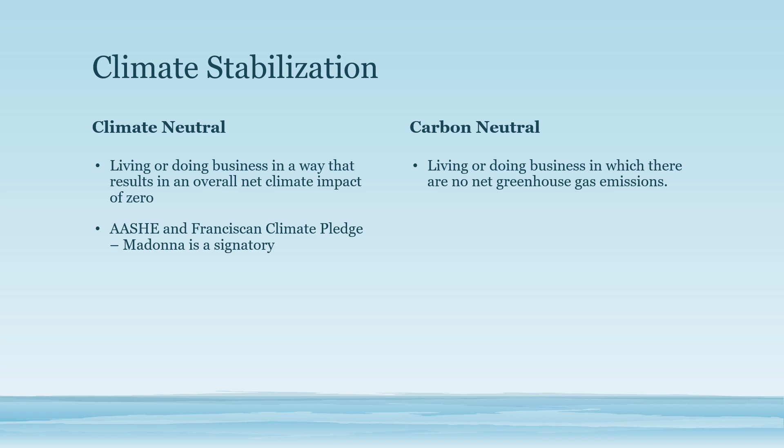Carbon neutral is living or doing business in which there are no net greenhouse gas emissions. It's not that much different - one looks at emissions of greenhouse gas, the other looks at total climate impact. The problem with carbon neutral is if you get too narrow a focus on it, you can overlook other greenhouse gases in addition to CO2 when formulating how you're going to get there.

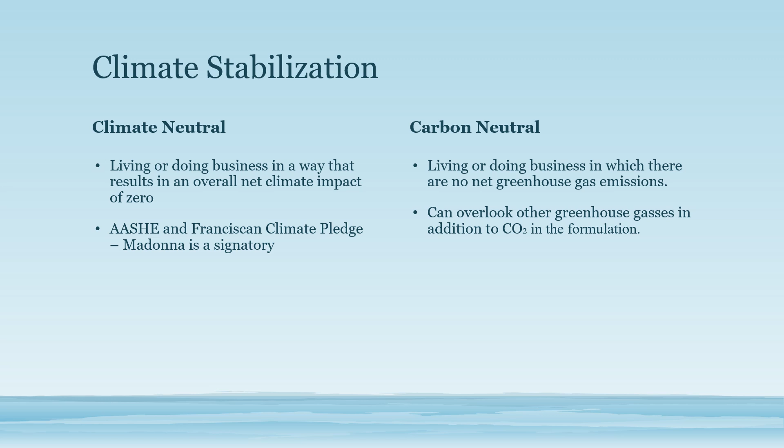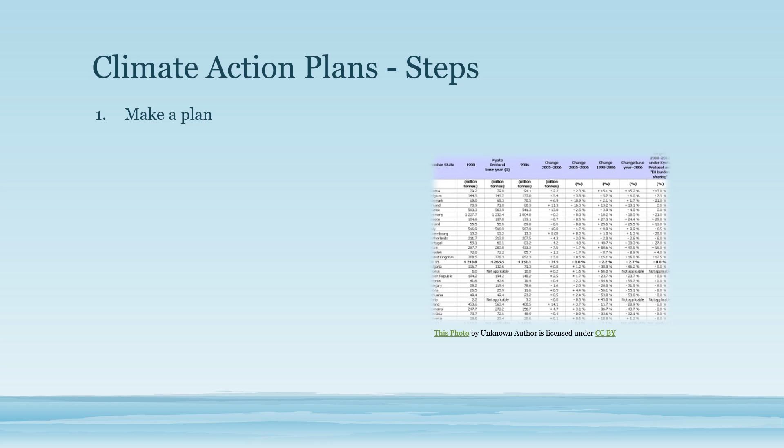So what are some steps for climate action plans? There are 4, as your text makes known on page 79: you make a plan, you measure - which involves preparing a greenhouse gas inventory, done on the right-hand side, which we'll talk about when we get into energy, especially Energy Star - then you reduce emissions, and offset any remaining emissions.

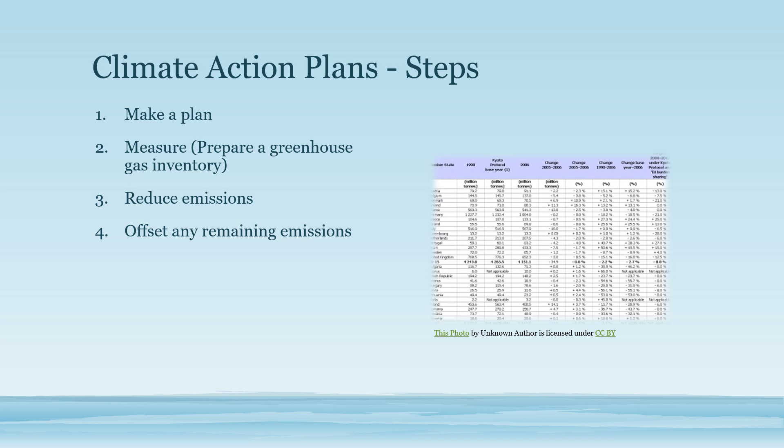So first of all, make a plan. What are the boundaries of the plan? How much of the organization is included? What's the scope of this? Who's got to buy in? Who's responsible? What kind of emissions will be the focus of the plan - just carbon dioxide, nitrous oxide as well, other pollutants, particulates?

Will the scope of emissions be strictly within the organization, or will we look at indirect use beyond it, like upstream or transportation among our employees or partners? You determine who's going to be involved in the planning process, who's going to be the leader, who the parties are. You get a group of people, either outside consultants and/or in-house - when Ford Motor makes their inventory, they have the resources to set up shop within. And then make sure every step is in writing, so everything's transparent and accountable.

So step 2 is measure, and you look at to what extent is your organizational reach in terms of what emissions you're going to look at and try to reduce. Scope 1 focuses on emissions that are owned by or controlled by the organization.

Then expand that. Scope 2 would include emissions from purchased electricity or purchased heat that you're taking in, whether it's a school or an industry or whatever.

Scope 3 would include indirect emissions from other sources, such as vehicles owned by others and used to transport people or goods, the extraction and production of resources purchased by the organization, and the end use of the product sold. What kind of packaging or whatever, how do we deliver that to places to reduce our carbon footprint?

Now, according to the Greenhouse Gas Protocol, which sets this forward, Scope 1 and Scope 2 should always be incorporated into a reduction plan. Scope 3, however, is optional.

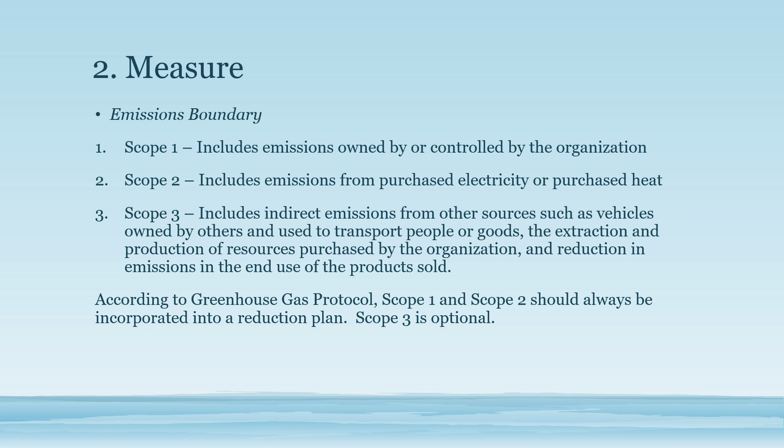So here's more about measure in particular. You collect data from several sources on emissions associated with the organization. Then you calculate. Tools are available for this step.

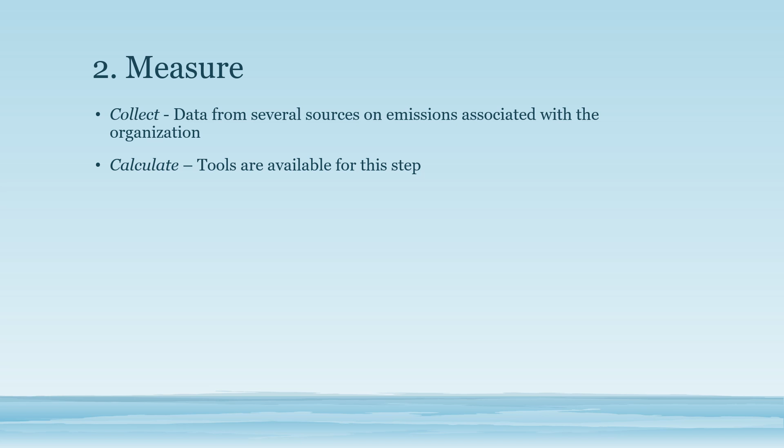And I'm going to talk about calculate when we get to Energy Star and the portfolio management database system again in a few weeks. We'll revisit this.

Quality control: you have a third party check the data and the methodology of collection to ensure integrity of the process.

And you have regular evaluation of the progress. As I mentioned, the EPA Energy Star Portfolio Management Database System does that. We'll walk you through that when we talk about Energy Star again.

So, to reduce emissions, that's number 3: low-hanging fruit, and then symbolically powerful approaches. One thing is to change your behavior, educate the staff—turn out the lights if you're going to be gone 10 minutes, set the temperature down when you leave, those kinds of things.

Energy efficiency: maximize your payback or return on investment. Payback is like how many years until an investment pays for itself—remember when you went from incandescent to compact fluorescent lights, it burned like 30% of the electricity. So the payback was in less than a year.

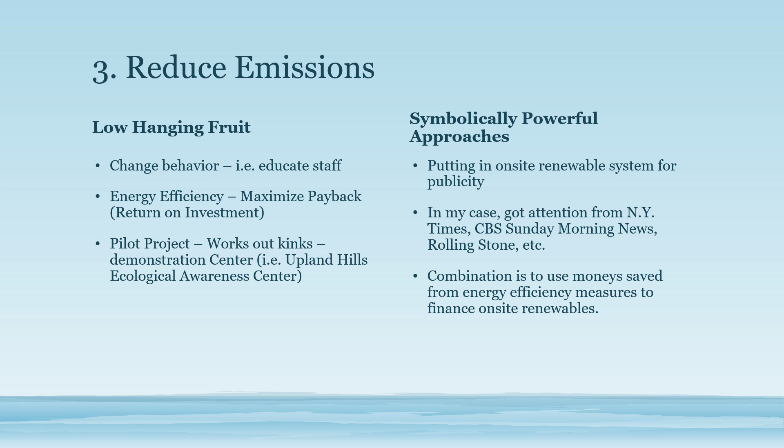So the combination then is to use money saved from energy efficiency measures to finance on-site renewables. These are symbolic because they're very visible. Even though energy efficiency is going to save you the most money and reduce the most—that's without saying—if you want public attention, sometimes you do these demonstration things, which are very visible, like a wind turbine on your site.

There are some energy strategies. Energy efficiency reduces demand - there's the demand side and supply side. Demand side is needing less energy, less fossil fuel to begin with. The supply side, or generation side, is producing replacement electricity from renewable resources.

The other thing you do is switching to a less polluting source. For instance, you go from a coal-fired power plant to plants that run on natural gas. They're still producing greenhouse gases, but much less, so it's a transition fuel - just like going from incandescent light to compact fluorescent light, then to LED light. Compact fluorescent lights are like a transition lighting source.

So you put out on-site renewables, or you purchase renewable energy credits, RECs, also known as green certificates. For instance, Native Energy is one of them, which I used to help support native wind farms - I was trying to be carbon neutral, and I still was. I did calculations one year when I went to a hybrid, doing on-site renewables, energy efficiency, using the local farmers market, but it was still way too much. So I asked, how could I be somewhat carbon neutral? The last part was purchasing offsets or green certificates - we'll see later.

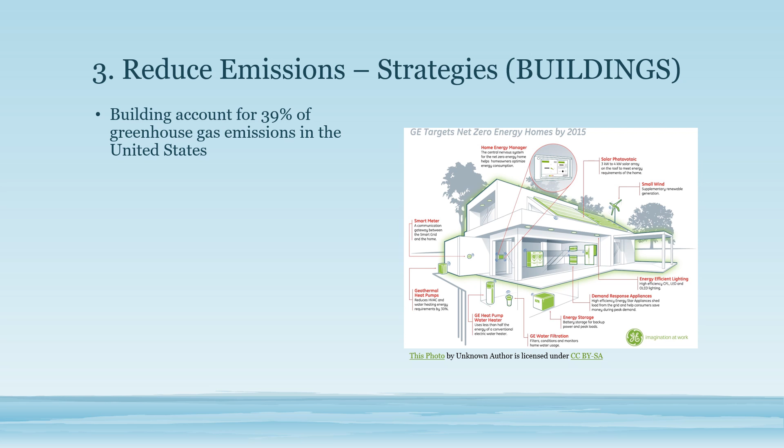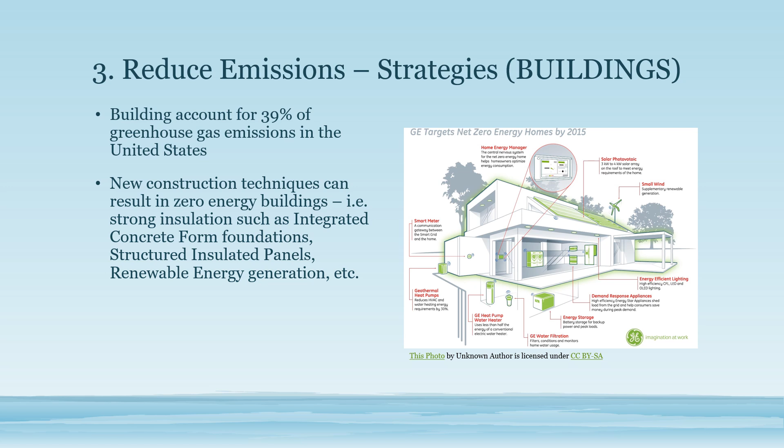Reduce emissions in terms of buildings. Buildings account for 39% of greenhouse gas emissions in the United States - that's not in your text, but it's another source I got. New construction techniques can result in zero energy buildings, as you can see in that picture on the right. There's strong insulation such as integrated concrete form foundations, ICF, and structured insulated panels. I went to a workshop on this in West Virginia some years ago just to learn it, maybe for my own future - renewable energy generation, etc. Using geothermal, geoexchange - we'll get to that, ground source heat pumps.

Operations and purchasing - you schedule maintenance on your HVAC systems, heating and cooling systems. You switch, and one thing you can do is purchase HVAC that's later called combined heat and power, but we'll talk about that when we get to energy.

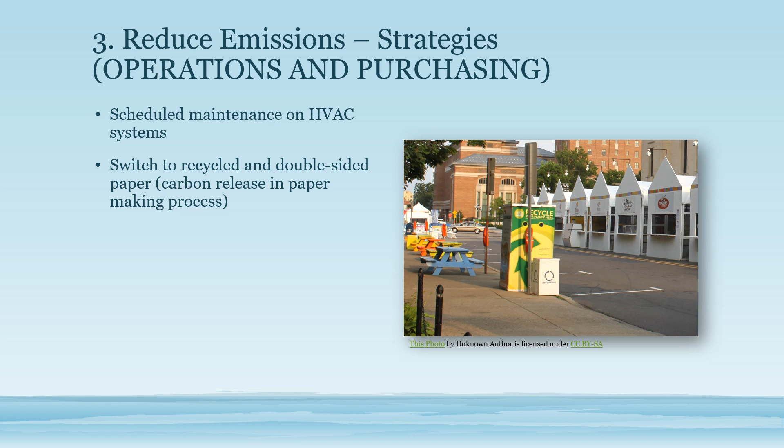You can switch to recycled and double-sided paper. Carbon release in the paper making process is quite intense - my cousin lives in Manistee, and there's this old paper mill that really spews out greenhouse gases. The use of recycled material requires fewer raw materials. There's a great recycling place that was first in Madonna near Henry Ford Hospital, and they also had things to make compostable products for eating, so it's become much more popular. Another positive benefit of recycled material is that it reduces the methane gas emissions that emanate out of landfills. I was trying to get this from Recycle Ann Arbor - you can see a recycling center there.

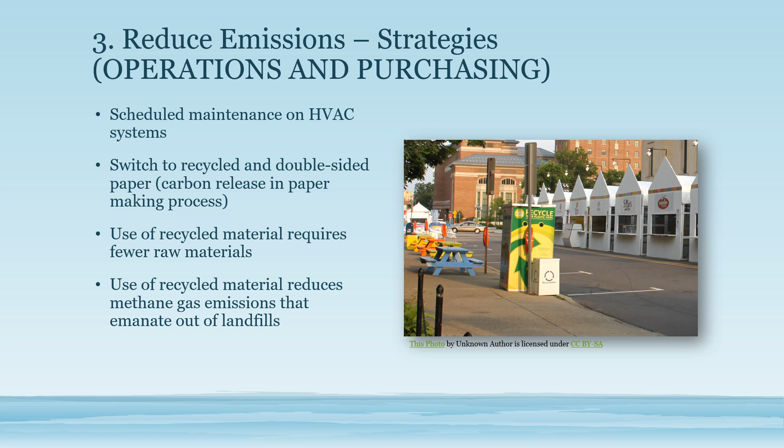And in terms of strategies in forests, farms, and soil, forests are carbon sinks. It's necessary to reduce or eliminate the clear-cut approach. There was so much of that done, just cutting everything. Now there's strategic, sustainable forest practices where you target individual trees that need it.

As much as 15% of carbon emissions come from deforestation. Someone says the Amazon rainforest is the Earth's lungs because it absorbs all that carbon, which means each acre of tropical forest sequesters as much carbon as the carbon emitted by driving a car 500,000 miles. So there's power in that.

And one thing is biochar. I've actually read a book on that because it's really interesting. This stuff is a powerful carbon stabilizer. You burn the wood at low temperature without oxygen, and it pulls the carbon out. It'll actually pull the carbon out of the air when you use that, and it'll also increase soil fertility. If you use it on farms, this is an ancient agricultural technique, biochar.

You can see it on the right there. There's some biochar that someone's holding.

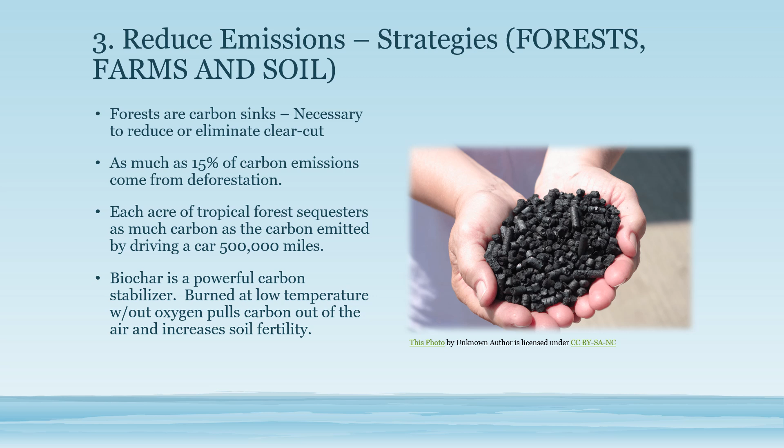Another strategy that's controversial is called carbon capture and sequestration. It's a technology that removes CO2 from the industrial process, like a plant, before it leaves and gets out into the air. It captures it and redirects it, so it's captured before it escapes into the atmosphere, and then is stored underground. Later, it's used for other industrial uses.

For instance, to help create extraction pressure in oil fields, you sell it to companies that could use that carbon dioxide because it fizzes. Or someone said, I remember someone talking about putting it in soda, for that little fizz, like Vernors.

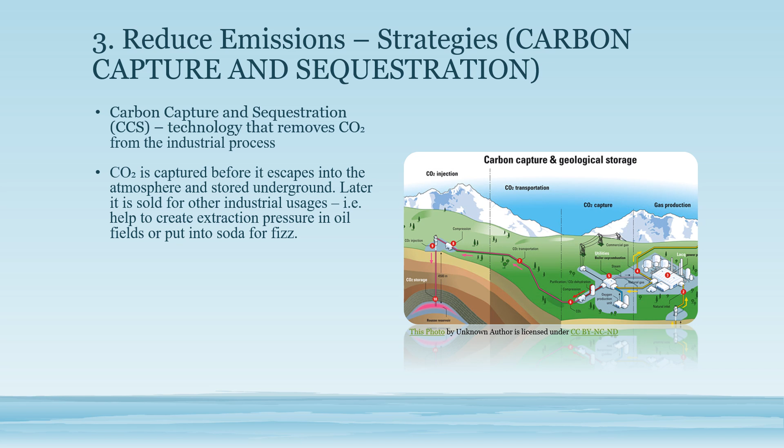So there's a carbon capture model there where the plant is, and then where they're storing the carbon in a cavern, like a cavernous area down well underground, redirecting it. So the one case, and we'll get to this when we get to your discussion board for this week, is geoengineering.

This is the use of engineering technology to reduce atmospheric carbon dioxide. For instance, sulfur aerosols put into the stratosphere to absorb sunlight, like a little bit of global dimming, or spreading iron particles around the oceans to increase the growth of algae, etc.

There's this group called Geoengineering Watch. I saw the website, and some of the science I'm not too sure about, but they say they're looking at what are the particular downsides of that.

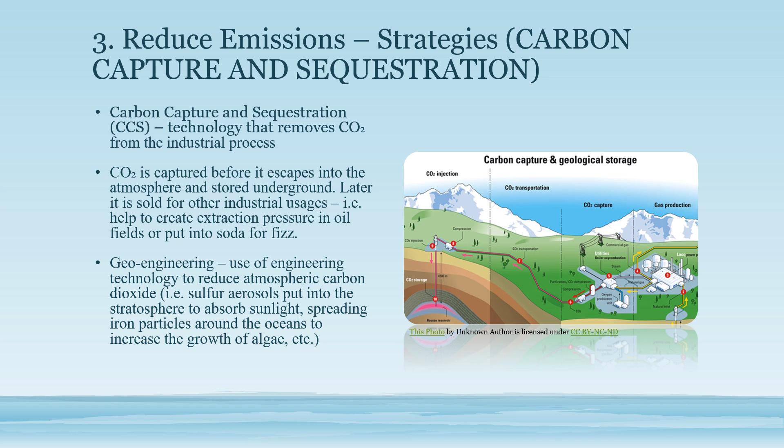The big question, I'll give you a hint now with the discussion board, is: is this what it's going to take to avert a catastrophe? Are we too far gone that you're going to have to use some kind of major cross-your-fingers-and-hope-for-the-best approach?

Another thing you can do is offsets. Offsets are voluntary payments made to initiatives to reduce the level of greenhouse gases in the atmosphere. They're sold in terms of tons of carbon dioxide, or CO2.

Commonly, offsets can be in the form of forests planted or wind energy underwritten. Remember, the Vatican was opting for carbon neutrality by purchasing forests in Hungary, planting trees to absorb the carbon that Vatican City was producing. They were trying to be, under Pope Benedict, the first carbon neutral nation state in the world.

And so you get these certificates. In fact, someone I knew, his daughter had a bat mitzvah, so I got her a gift of carbon offsets from Native Energy, and he loved it. He just kept telling his friends and bragging about it. It was a gift.

So there's a big problem, though. I noticed this back and forth, and I did notice it when I was directing Michigan Interfaith Power and Light: how do you know what they say they're offsetting is what they're really doing? The quality control, regulation, that's where the devil's in the details. So that's a challenge there.

Another is emissions trading. So cap and trade, for instance, is the system of buying and selling permits to pollute. There's a total emissions goal set, which is reduced year by year, and the more polluting companies buy permits to pollute from the better performing companies. So the better performing companies save a lot more money, and it's economically feasible for the permit.

It's beneficial. It's incentivized for the polluting companies to not have to pay these other companies, so they can find their own technologies and ways to reduce their own pollution at the source. And as you keep ratcheting down the total year by year, that makes the difference.

In fact, this is what the proposal back in 2009 or so under President Obama tried to do, and it didn't go too far in the Senate. But it was used before successfully in addressing the acid rain issue in the early 1990s.

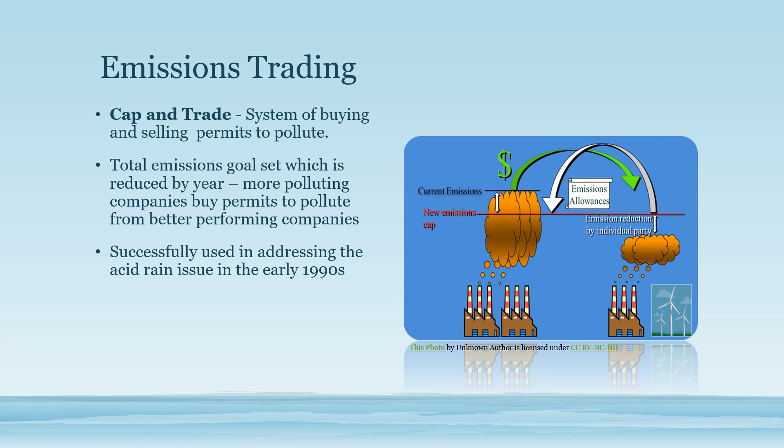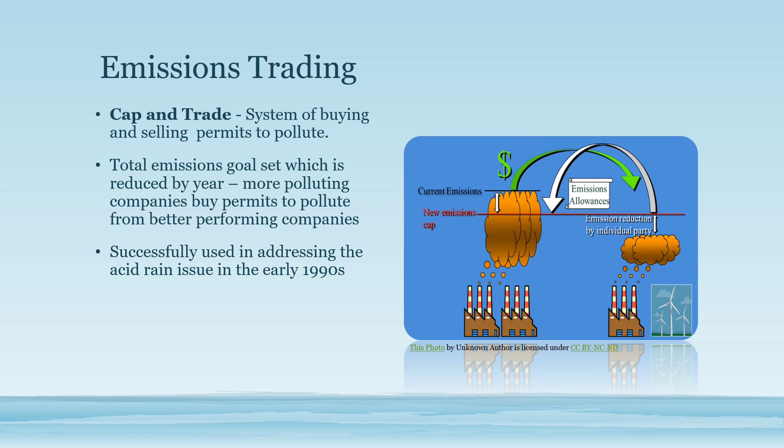Sulfur dioxide - they were able to do cap and trade with that. Some countries are doing that now, and some have markets like the carbon market.

Carbon tax and dividend - you tax carbon at the source, and then provide dividends to lower income folk who would bear more of the burden. Everybody pays more for carbon use, so other things cost less relatively speaking. For poor people who need transportation, it's a bigger bite out of their income, so there's a dividend back. This is the approach of the Citizens Climate Lobby, which you have in your resources this week.

What I like about it - and I was active with them for a while, I want to get active again - is that they have a strictly bipartisan approach. For every Democrat sponsor of legislation, a Republican has to be willing to be a co-sponsor as well. I don't know how many people they have, but it's catching on. There's a long way to go before it gets critical mass, but at the state level there are some states going for this.

And of course, there's adaptation. It's a realization that no matter what stabilization strategies we adopt, sea levels are going to rise, more climate refugees will have to be addressed, and the climate will impact what crops are able to grow where in the future.

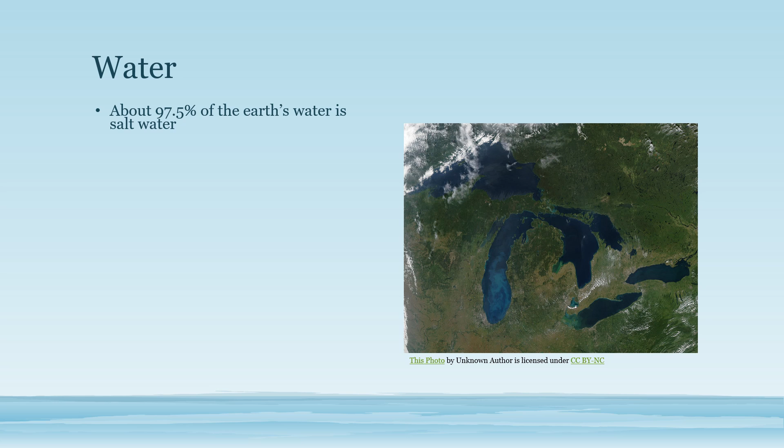So this brings us to water. The chapter on water notes that about 97.5% of the Earth's water is salt water - almost all of it. Fresh water then is a renewable resource, but the problem is that overpopulation, especially in certain poor areas, overconsumption, and uneven distribution of fresh water leads to a water crisis.

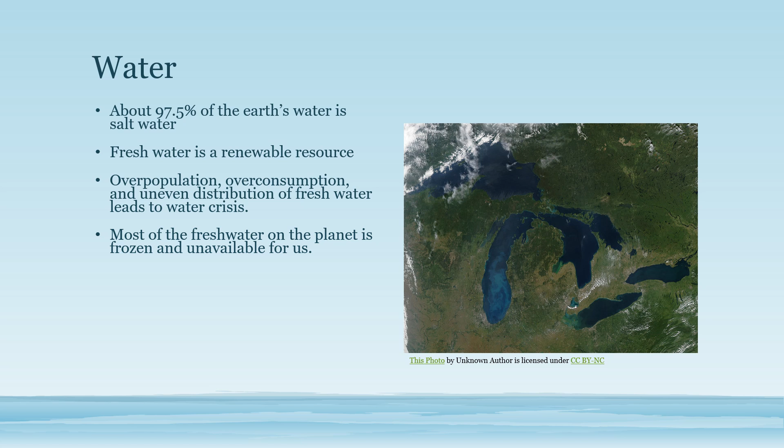Most of the fresh water we do have available is frozen and unavailable to us. In the United States, the fastest growing communities in the West and Southwest are in the areas with the least available water. The irony is that here in Michigan, with this class at Madonna University, we are the most water-rich area - the Great Lakes can constitute 20% of the world's available fresh water.

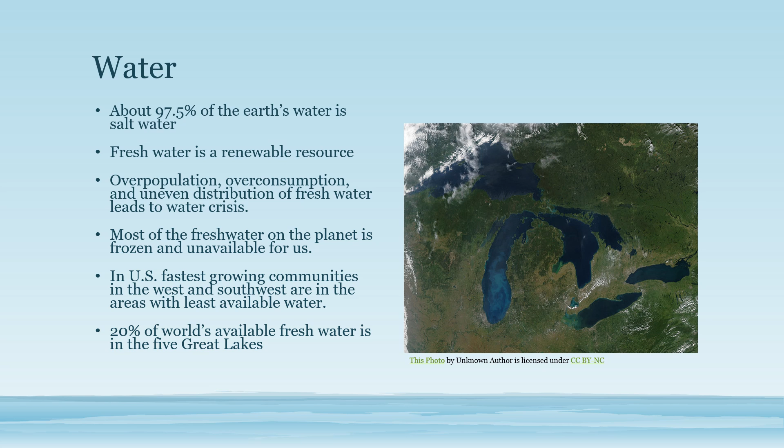It's in these five Great Lakes, as you can see we are tremendously spoiled. I remember a number of years ago when they were talking about the Southwest water drought, they wanted to see whether they could divert water from the Great Lakes to places like Arizona and New Mexico. There was a Great Lakes Compact among the governors of the Great Lakes region and Ontario that basically said hands off - if you want the fresh water, move back here.

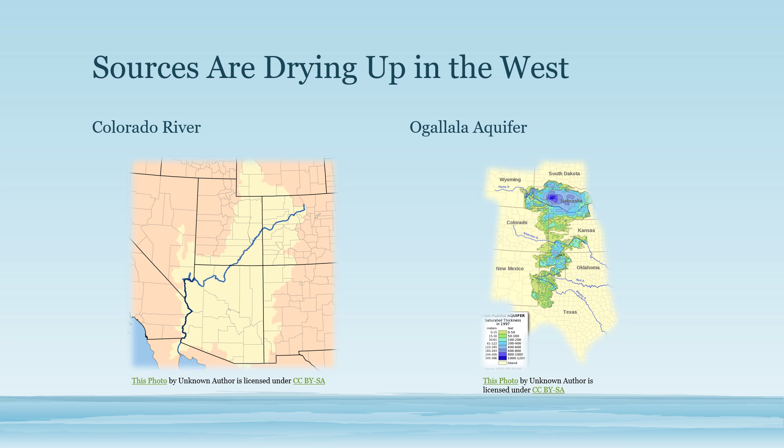The sources are drying up in the West, and the two biggest your text mentions are the Colorado River and the Ogallala Aquifer. We'll talk about those - the Colorado River, along with Northern California, is one of the big sources for the Southwest and Southern California, along with the melt from the Sierra Nevadas. The Ogallala Aquifer is basically under the Great Plains down to Texas.

So let's say more about aquifers - just some definitional terms. When you see bold print, keep that in mind because we have a midterm; the first part of the class is getting some language straight. Groundwater is when the ground soil is saturated with water - like at the metro parks, you get that spongy, marshy ground, almost not quite wetlands, but an area kind of overflowing with water.

The ground is saturated basically, it can't hold any more, and so it starts to pool up on top. That's the water table—how much water, just pure water, is exposed on top of the ground.

The aquifer then is just a large deposit of groundwater from a large area. Subsidence is when aquifers become depleted and the ground begins to sink. You see that in cities around the world, and it concerns even our areas.

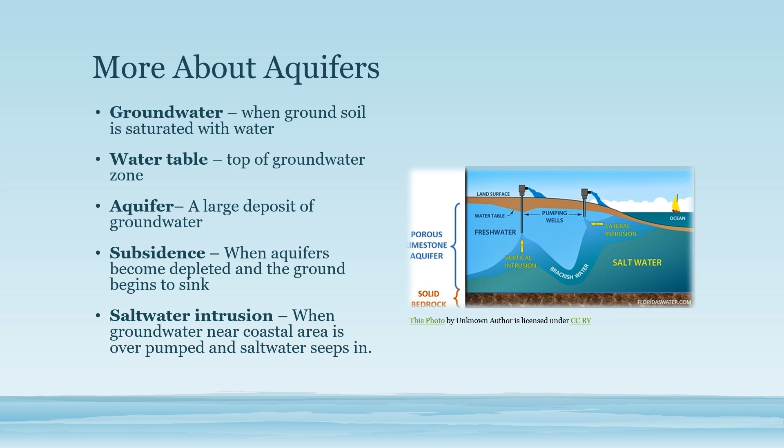So the misallocation of water is both a human and an ecological ecosystem threat.

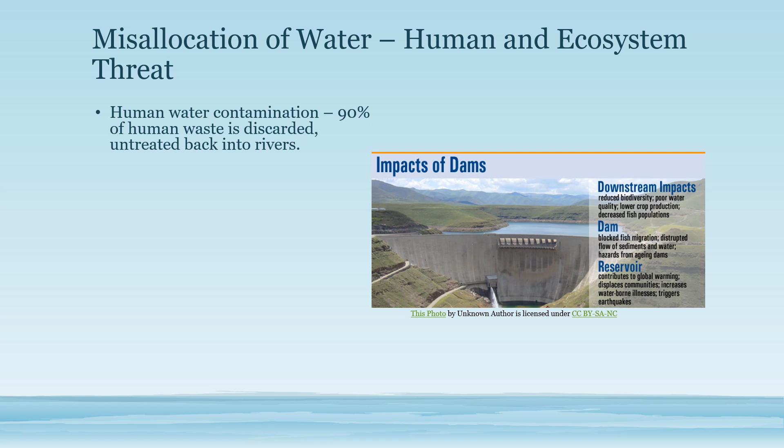Human water contamination: 90% of human waste is discarded untreated and put back in the rivers. But there's also chemical contamination, pollution, fertilizer, etc., from farms, like factory farms. If you go out to I-96 in West Michigan, you can smell it.

We'll get into that more with concentrated CAFOs—not only what it does to the animals, poor animals, but all this manure and stuff goes into the water system. That's why you have things like E. coli with spinach and these big recalls from farms in California. It gets into contaminated water—these farms and industry are washing the soil and the groundwater, and bad bacteria happens, like E. coli, etc.

And so the depletion of aquifers dries up the cleansing wetlands and area habitats.

These are what dams are doing. Dams alter the flow of rivers, they starve sediment, and they result in released methane gas because of decaying vegetation. So there's a lot of issues involved with dams. People say hydroelectric power, on the one hand, is non-CO2, but there are other kinds of impacts on the ecosystem.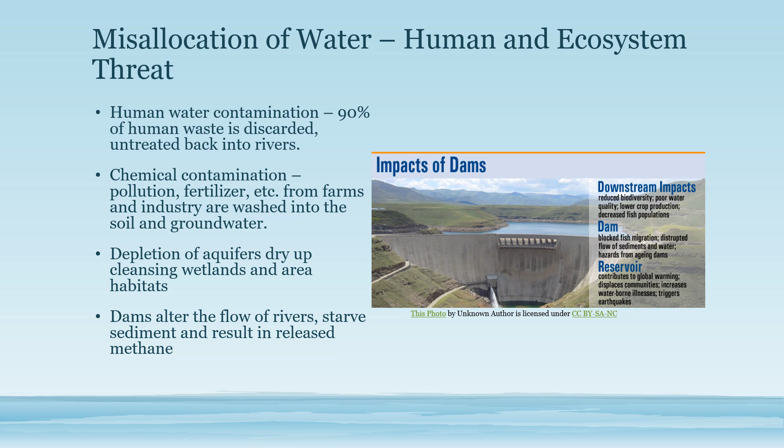It's not just on the water area—it can be very, very negative. You can see the downstream impacts: reduced biodiversity, poor water quality, lower crop production, decreased fish population. The dam itself blocks fish migration, disrupts the flow of sediments and water, and creates hazards from aging dams. The reservoir behind it contributes to global warming, displaces communities, increases waterborne illnesses, and triggers earthquakes.

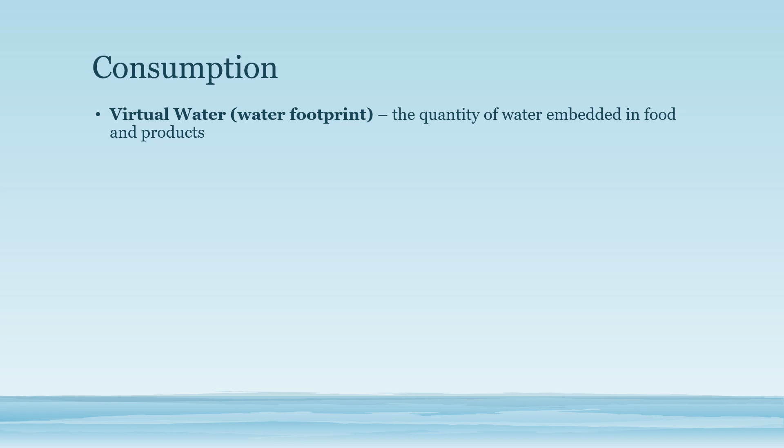When we talk about consumption of water, your text talks about virtual water, or the water footprint—another name for it. This is the quantity of water embedded in food and products, in manufacturing, packaging, and the like. The higher up the food chain, the greater the water content.

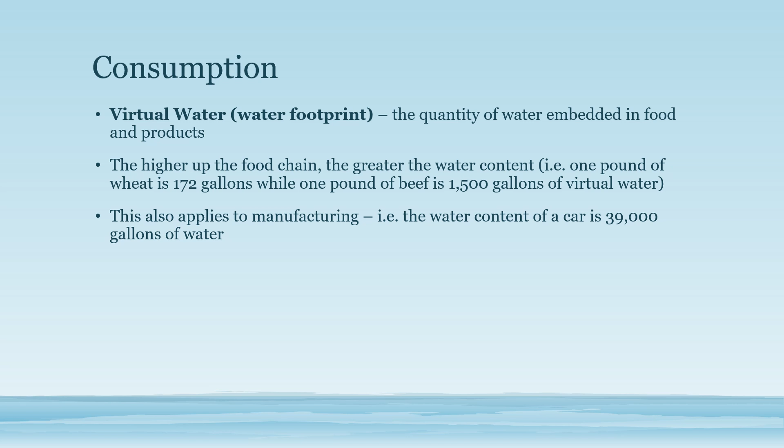For instance, 1 pound of wheat takes 172 gallons of water, while the same pound of beef is 1,500 gallons of virtual water embedded in the whole process of feeding—think of the life of that cow. This also applies to manufacturing: the water content of a car is 39,000 gallons of water.

More than half of the water used by industry goes into producing energy. Now there's growing use for irrigating agricultural biofuels, such as corn for ethanol. So while you're trying to say, okay, we're doing corn to use less oil, energy independence, grow our own fuel—but particularly as opposed to something like switchgrass, corn is very energy intensive, nutrient intensive, and water intensive.

Worldwide, agriculture makes up 70% of embedded water use, 20% for industry, and 10% for domestic use. Now, as your book tells, the U.S. is a little different—domestic use is a bit more, at 13%.

So what are the things with climate change and water issues? Currently, population and economic growth are the most important factors impacting water issues right now, but by mid-century, it's going to be climate change. As I said, climate is like the substratum for everything we'll probably be addressing throughout the rest of the semester.

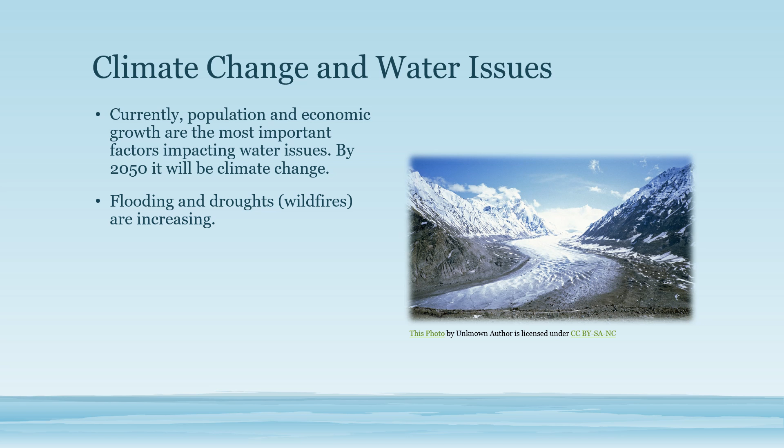Flooding and droughts, like wildfires, are now increasing, as we see in California, with the dryness there and the winds that happen—it's caused the worst wildfires in recent years there.

In the Himalayas, the receding of glaciers is a big one, threatening to dry up the fresh water supply for some of the world's biggest populations in Southeast Asia. Even the Ganges River in India begins in the Himalaya mountains. As these glaciers retreat, there's less water available for people in China, Nepal, India, Pakistan, and some of the most population-dense places in the world.

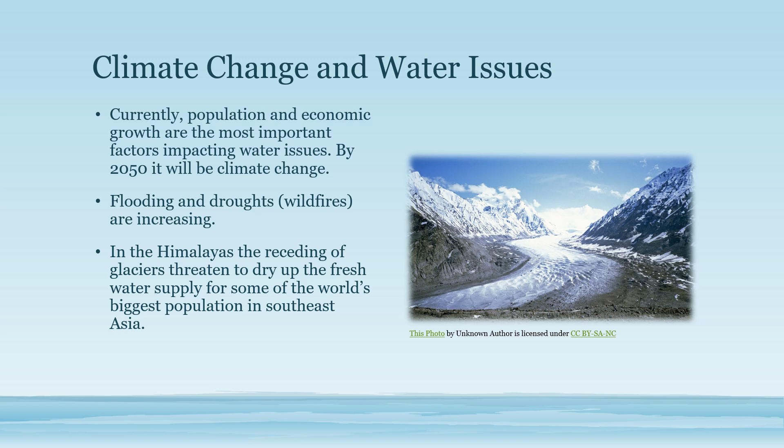In terms of water conservation, on the supply side, the text talks about harvesting rainwater, desalinizing seawater, and protecting the aquifer that supplies drinking water. That's how you get water from new sources—that's supply.

Demand is like the energy efficiency side—low flow plumbing fixtures that use less water, fixing leaks, recycling water from cooling systems, or more efficient landscape irrigation practices. The rest of this chapter will get into these in detail, and then eating lower on the food chain, of course.

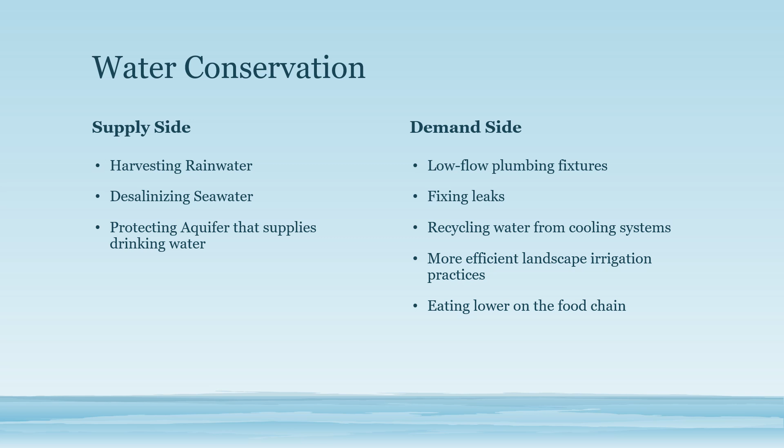In terms of residential water conservation, there are both technical measures and what we call practice or process measures. An example of a technical measure would be a low flow shower head, or converting landscapes to an efficient irrigation system. I have an example of a low flow shower head that I bought for $9 from Real Goods back in the 90s, or around 2000, where you could shut off the water—just flick that switch while you're lathering—so it's not running continuously.

On the other hand, there are behavior changes, such as taking shorter showers, and you'll need educational resources for behavioral measures to last. We'll get into that about fostering sustainable behavior in a little while—it's like, how do you become a social change agent?

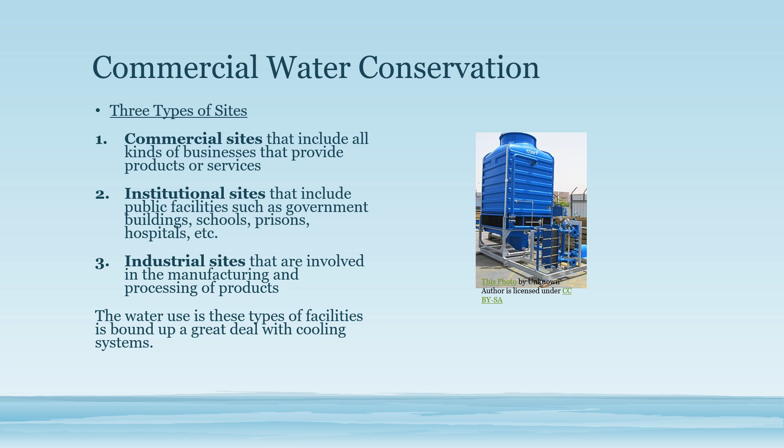Now, domestic water use: the biggest use of domestic water is in the flushing of toilets. So solutions can be dual flush toilets, or even, if you want to get radical, composting toilets, which I know the Leslie Science Center in Ann Arbor has, where the human waste becomes compost and is used in the garden, believe it or not.

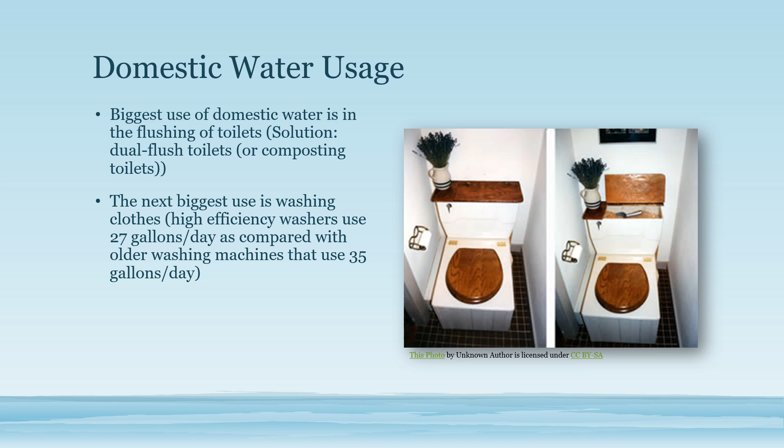The next biggest use is washing clothes. The text notes high efficiency washers use 27 gallons a day compared with older washing machines that use 35 gallons. Again, look for the Energy Star label if you go to Lowe's or someplace.

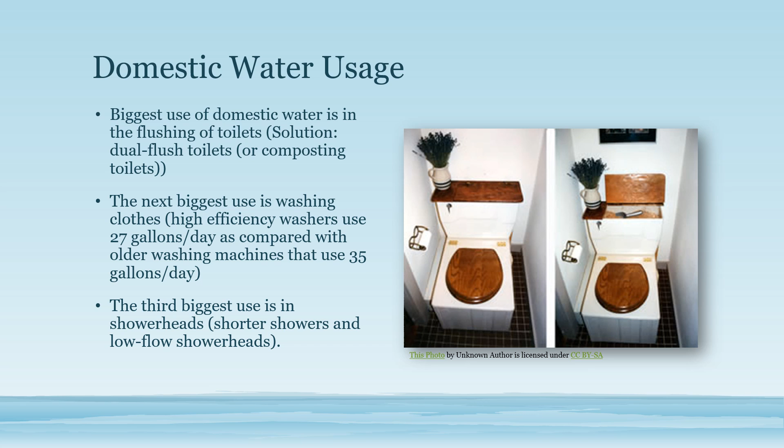The third biggest use is shower heads—again, taking shorter showers and using low flow shower heads can help address that. Another area is irrigation: in the American West, 70% of residential water may be used to keep lawns green. Drip irrigation, shown there on the right with lines that drip off, uses 30 to 70% less water than traditional sprinklers.

There's also lawns to consider - how many of them in places like Arizona, as was already mentioned. You're trying to use something that brought up a green grass lawn, which is used in the English countryside, and you try to transplant that into a different climate like the American West or Southwest - it just doesn't work. It's too intensive. Or golf courses, for instance.

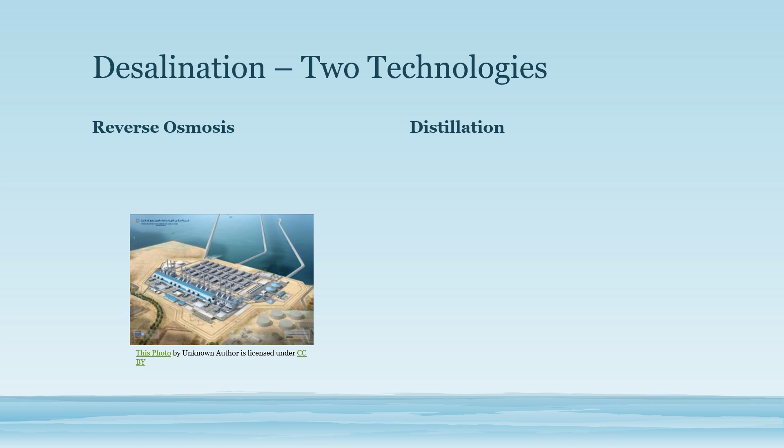But desalinization - your text talks about two different types of technologies. One is reverse osmosis, some people have that in their homes too. There can be a microfiltration system where water molecules pass through a membrane, but the salt molecules remain, so in a sense it captures the salt molecules. That's one area. Then distillation is you boil water to produce steam, and then you catch the water as it condenses.

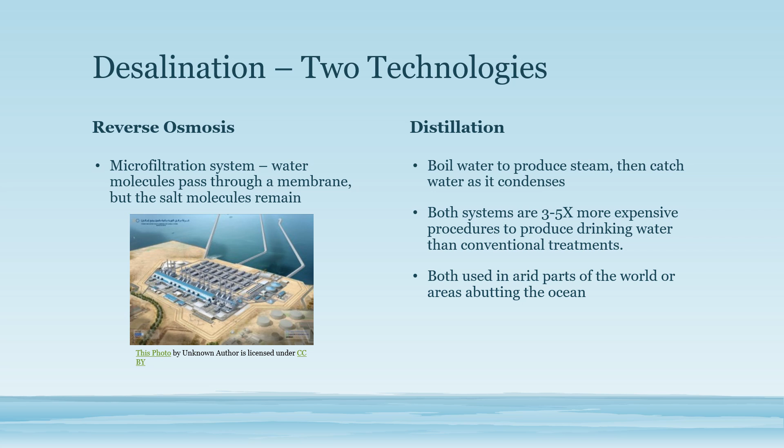Anytime you go to the store and get distilled water, there you go. And there's a desalination plant, or a model of one, and you see a picture there. Both systems are 3 to 5 times more expensive procedures to produce drinking water than conventional treatments. However, in some places, arid parts of the world, or seacoasts, it may be worth your while. There's even one in California. So both types, reverse osmosis and distillation, are used in arid parts of the world, or also areas abutting the ocean, as the picture shows there.

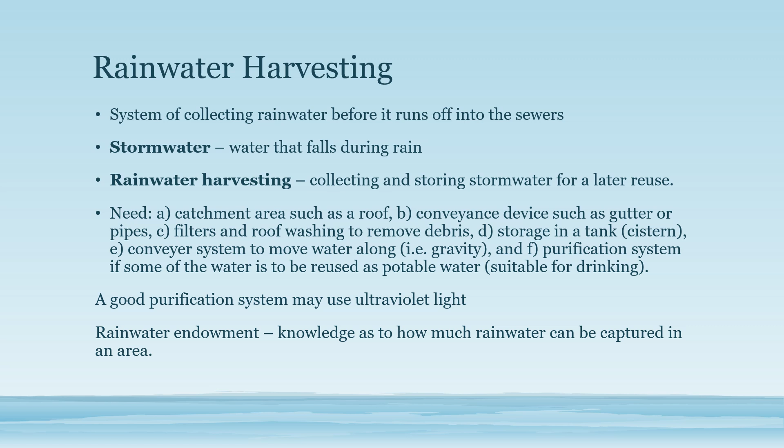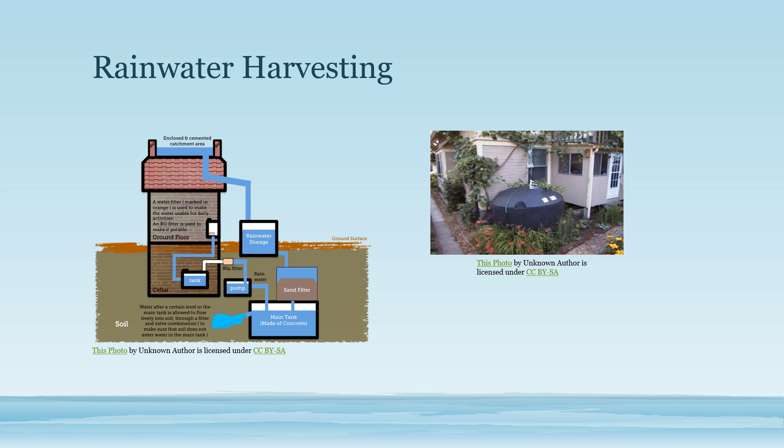So here's a couple of examples of rainwater harvesting. You can see there's a catchment, there's storage, and then the tank, so you can see how it's moving water in. There can be a sand filter, a purification system, or there's another one over there.

However, you can have something not quite with all the elements, but as simple as a rain barrel, which I had in my parish in Wyandotte. We had an organic garden, and so we had a rain barrel - you can see bricks or cinder blocks holding it up so gravity can move the water down. We had it tied into a drip line, drip agriculture along the beans, and it came out the gutter. This one, as you can see, has two - you can connect them. I've had several rain barrels in another parish I've been at, but it's the best kind of water for fertilizing because it's rainwater, with all the natural minerals.

Now another term is gray water reuse. Gray water is wastewater collected from bathroom sinks, showers, other kitchen sinks and bathtubs, to reuse as toilet water.

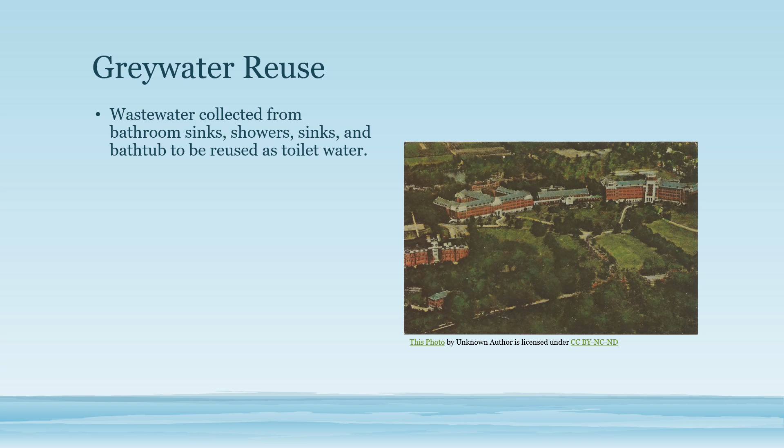And you can see there, that's the IHM Mother House, and they've done a phenomenal green renovation. If you want, one of the sustainability leaders was talking to someone like Daniel Conroy there, who is the project manager - you can see what they've done, which is phenomenal.

One thing they did with the gray water - they constructed a wetlands in their back area, and if you look at that picture, you can see the water in the upper left-hand corner there. That's a pond that was constructed. They have a little windmill that pumps the water along, and it comes out of their showers and sinks, gets in there, and actually filtrates it so it's cleaner than it has to be. Then it moves back and is used in their toilets. They save 6,200 gallons of water use per day just by doing that - I think I heard it's close to 50%.

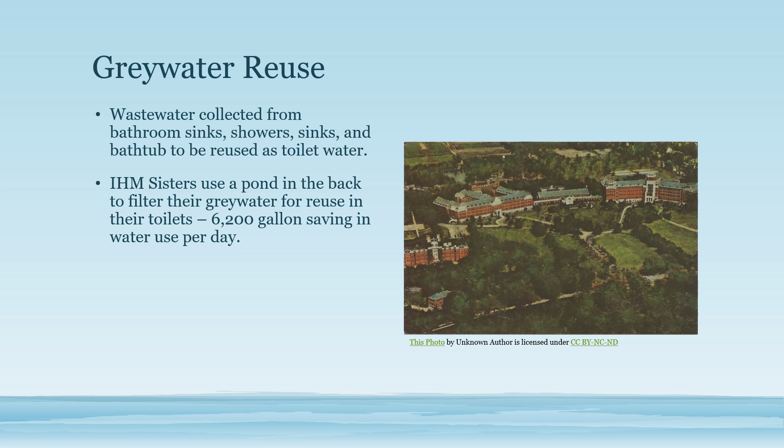I haven't found the exact statistic, but it's a phenomenal amount of water savings. Remember, toilet flushing is the most intense use of water, which is why low flow or dual flush toilets are really good. I had a dual flush toilet when I was in Wyandotte, and they have them at the Franciscan Center in Madonna. They're getting more important now, distinguishing liquid waste from solid waste in terms of how much water is being pushed out.

Wastewater treatment is all the water that runs out of the building after it's been used by industry or residential customers. In rural areas, wastewater is diverted into septic tanks where bacteria break down the waste. In urban areas where most folks live, gray water and black water run into the same system. Now the law requires that they be treated before being released back into the ecosystem.

Urban wastewater treatment has 3 levels. Primary treatment is where solids are removed, with grit removed by allowing the wastewater to rest in settling basins. Then there's a biological process in which aerobic bacteria break down organic waste and some chemicals and metals. Then there's a final filtering and disinfection process.

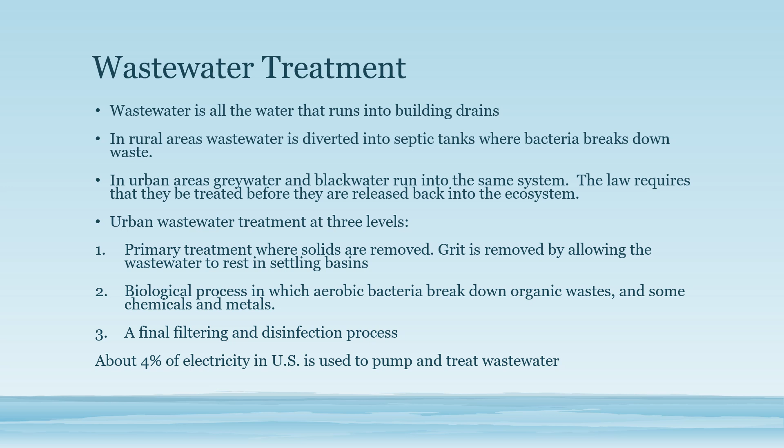So it's a 3-tier process, and it's used as an impact because, remember, all things are related—we're taking a systems view, not just topic by topic, but in context. 4% of electricity in the United States, especially from fossil fuel use, is used to pump and treat wastewater.

There are, however, alternative technologies in the treatment of wastewater which I find very exciting. One is constructed wetlands—these are engineered to use natural processes from communities of plants, soils, and bacteria found in wetlands. The city of Mount Clemens at one time had such a system in place, where wastewater flows through subsurface gravel where bacterial treatment can happen.

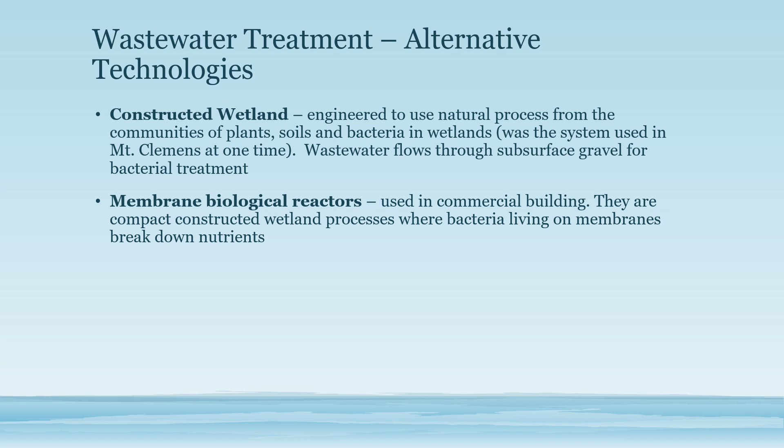Another technology is membrane biological reactors, often used in commercial buildings. These are compact constructed wetland processes where bacteria living on membranes break down nutrients, with the water passing through the membranes being treated.

Then there's the living machines, started by someone named John Todd in New England. These are patented wastewater treatment processes where primary treatment takes place in large tanks. The wastewater flows into tanks filled with water hyacinths, cattails, and other plants that take up nutrients. Then it flows into gravel, then into other tanks where it's consumed by zooplankton and snails, then by fish, and finally into polishing wetlands. It's several natural processes in sequence, one step leading to the next.

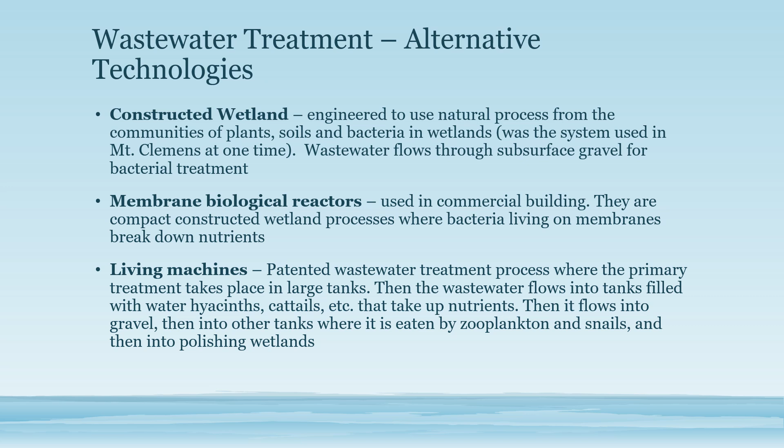Now, stormwater. When the land is undisturbed, nature has its way—the system works. The natural processes connecting water, soil, and living systems work together in a self-sustaining way. Rainwater in this system stays or moves slowly, which gives time for cleansing and is also a hedge against flooding.

When wetlands are replaced by buildings and roads, there's a significant lack of protection and cleansing capacity is lost. Case in point: New Orleans, 2005, Katrina. The wetlands there, which were once abundant, had been hindered by a lot of construction, including housing, in places that had been wetlands. So when the hurricane came in, the wetlands were not as effective at absorbing the floodwaters. The rest of the story we know—the levees broke, so it could no longer act as a buffer, and we saw New Orleans partly underwater.

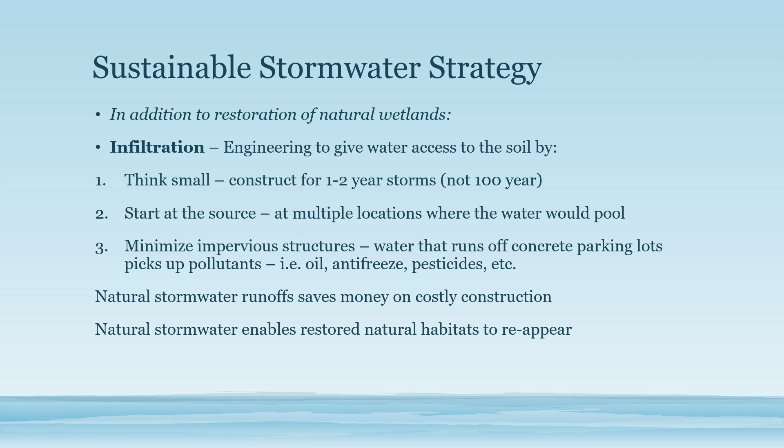At Crosswinds Marsh, when wetlands had to be destroyed for the Metro Airport, Crosswinds Marsh in Sumpter Township was constructed—about 2 or 3 times as many acres of constructed wetlands. Now there's a great marsh for birds and herons that people in the area can go see.

With natural ground cover, water infiltrates deeper—about 25% shallow and 25% deep infiltration—as opposed to impervious cover, where it's only 10% and 5%. With a permeable, natural stormwater system you get about 10% runoff, as opposed to 55% runoff with impervious cover. That's a big difference in terms of water conservation.

The City of Detroit now has a program where nonprofits, churches, and anyone with large parking lots or residential properties have to develop systems and apply these technologies to save on stormwater runoff.

Another best management practice, or BMP, is low impact development, LID. One example is a rain garden—planted depressions in the landscape with native plants that temporarily collect stormwater runoff. It slows the water down, collects it, filters it so it doesn't rush after a big rain, and lets it out slowly.

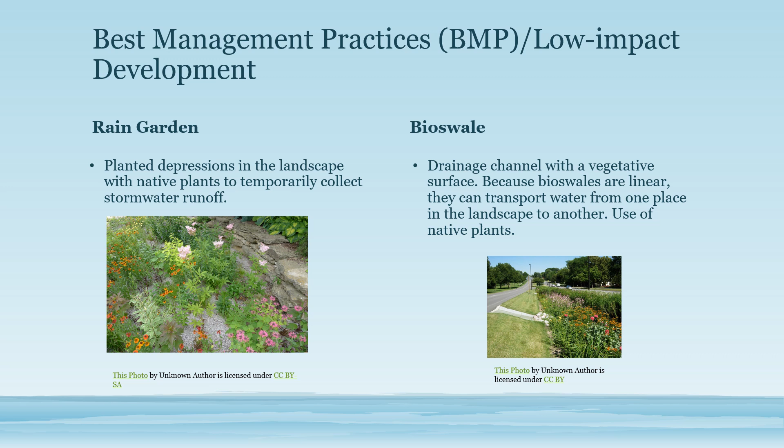Residence time is the amount of time water stays in a swale. For a bioswale, it's usually between 1 and 4 days, and there's a formula for calculating it.

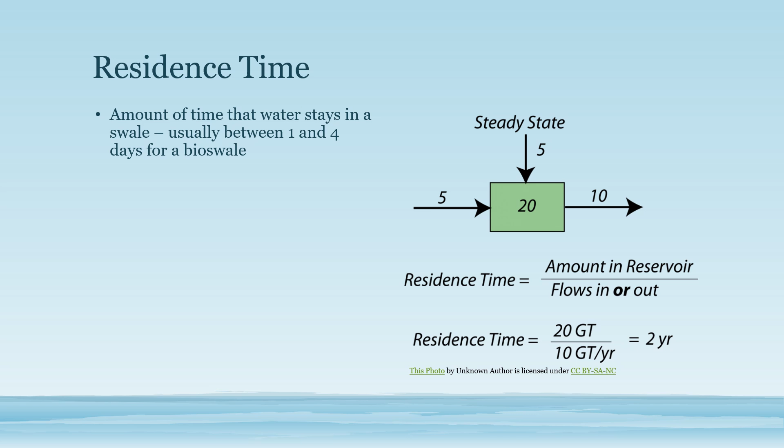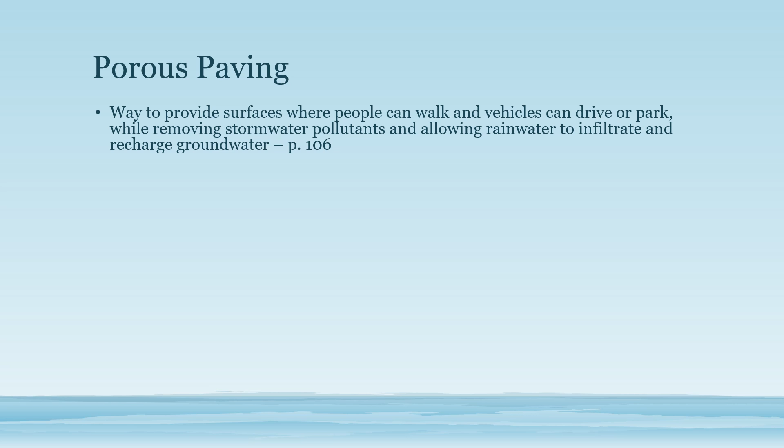We'd be remiss not to talk about porous paving. This provides surfaces where people can walk and vehicles can drive or park while removing stormwater pollutants and allowing rainwater to infiltrate and recharge groundwater. The aggregate used is coarse particles of rock, like sand or gravel. Open graded aggregate, all the same size, works especially well.

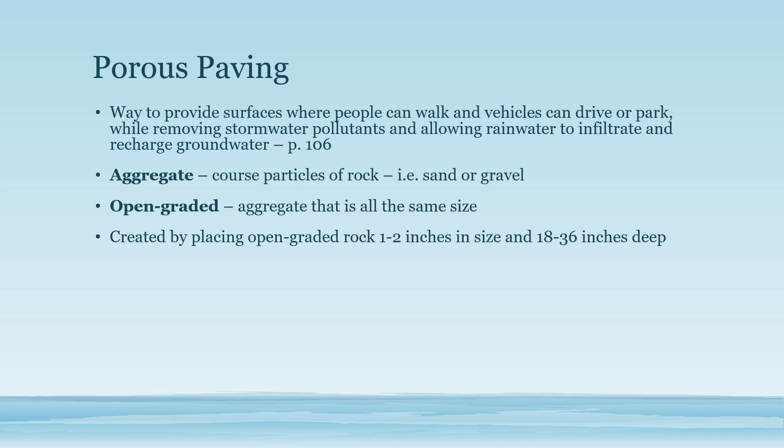It's created by placing open graded rock, usually about 1.5 inches in size, 18 to 36 inches deep underneath the surface, replacing the soil. When water comes through, it serves two functions: it stores the rainwater, slowing it as it infiltrates to the soil below beneath the porous paving, and it acts as a bioremediation site where bacteria on the rock break down petroleum-based pollutants.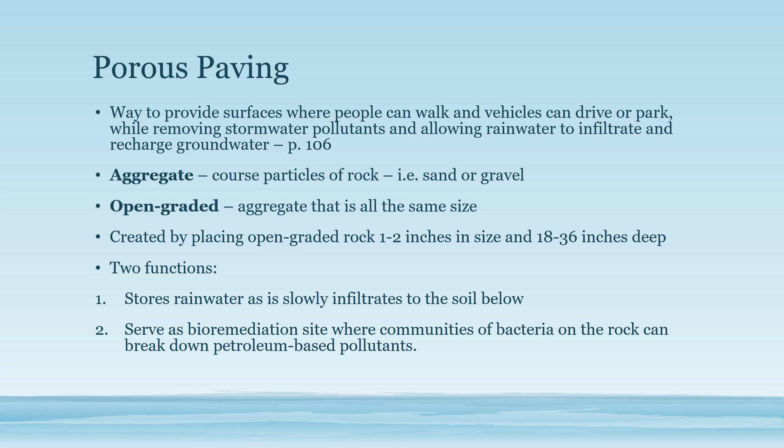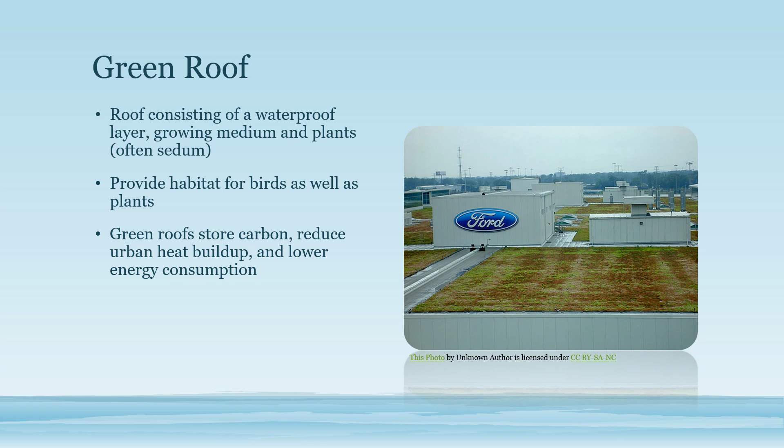Finally, we have green roofs. This is a roof consisting of a waterproof layer, growing medium, and plants. Often sedum is the plant that's used—it's very hardy and provides a habitat for birds as well as plants. Green roofs store carbon, reduce urban heat buildup, and lower energy consumption, and they save a lot of money.

Because you're not paying for all the stormwater stuff—when the Ford Rouge plant was constructed and they put the green roof on top, they reduced the cost by $38 million. That's what got young Bill Ford's attention.

And it's also a great place—people can take tours of the Ford Rouge plant and see the sedum. It's just environmentally friendly. Birds come and nest there, lay eggs there. It's a really incredible experience. People are increasingly doing this at homes too, because it provides some insulation from heat.

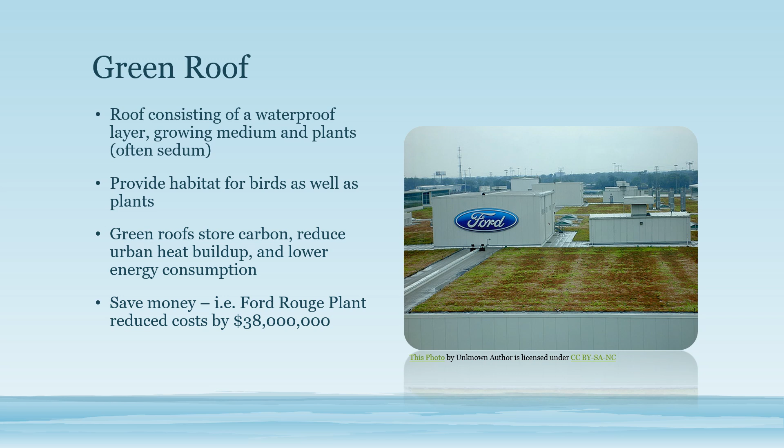It reflects off heat, so it reduces your heating bills or air conditioning bills in the summer, and it stores heat in the winter. It's good all the way around, green roofs, and that's something becoming more and more popular as people think about ways to be more environmentally friendly.

So, just briefly, the web and video resources this week. There's a video of Blue Gold: World Water Wars—I strongly recommend you take a look at it. It shows what's going on in the world, and even though it's a few years old, it's very good. You can find it on YouTube. There's also two websites on water activism for nonprofits: the People's Water Board and the Friends of the Detroit River.

There's a website for the Citizens Climate Lobby, which we addressed before—these are the advocates of carbon tax and dividend. Just take a look at it to see. There's the website of the IPCC, the Intergovernmental Panel on Climate Change, the website of the Catholic Climate Covenant—again, you don't have to look at these, I just recommend seeing what they look like—and then the website of the Association for the Advancement of Sustainability in Higher Education.

So the video, I'd check, at least peruse that—you can bounce around it, but it's very powerful if you have time. You can watch it, but I'd suggest especially the end, when they look at possible solutions and then privatization of water. We haven't gotten to that yet—we'll get into that later. That's a big issue.

Then there's the discussion board: changing behavior versus technology to address climate and water. Over the course of last week and this week, we've attempted to address the real problems the contemporary world faces with the disastrous impacts of climate change and the world water crisis. Some folk propose that to address these problems, we should adopt a lower technological lifestyle to lower our footprint—publications like Mother Earth News embody this vision. Others argue that since technology got us into this mess, human ingenuity and technology is the path to get us out, and perhaps the geoengineering people best embody this approach.